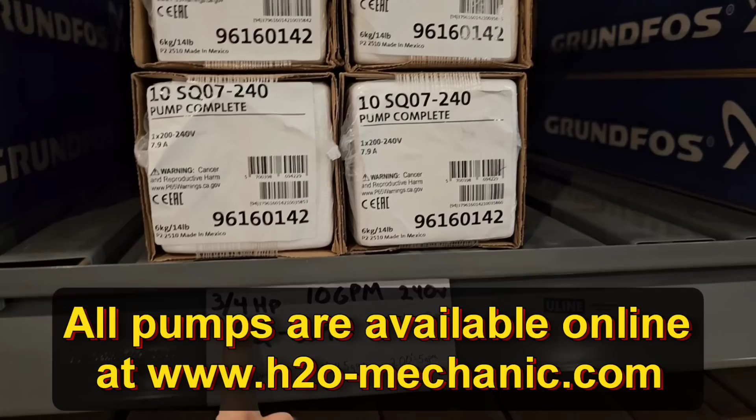We recently got some brand new Grundfos models in stock. This one, for example, let's see, SQ-240. So what we're going to do is a 3/4 horsepower, 10-gallon a minute pump. We're actually using this pump here to take the place of this pump here. So we're no longer going to sell the SQ-200. We're strictly jumping to the SQ-240.

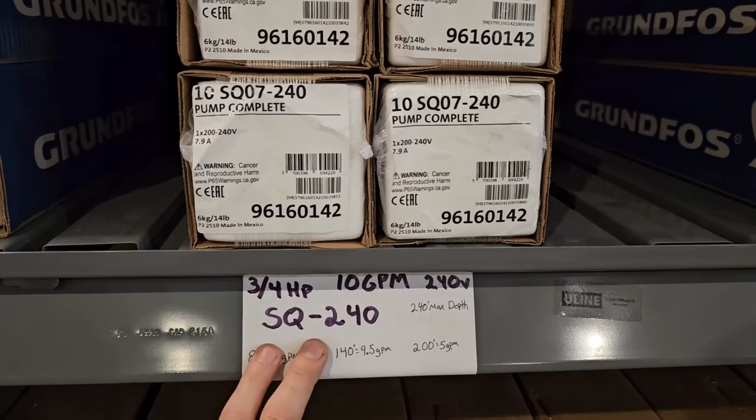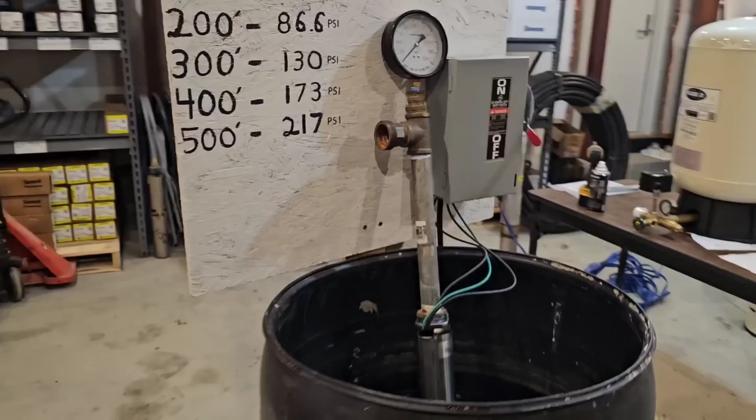So I've got somebody here today who wants to buy the SQ-240. So we're going to throw it in the test tank, and we're going to see what kind of pressures and what kind of flow this pump will actually do. Now we've got the 3/4 horsepower SQ-240 in the test tank right now. Got the wires hooked up. I still got to get my water flow meter hooked up in my return line. I need to get about 5 gallons of water and put it in the tank.

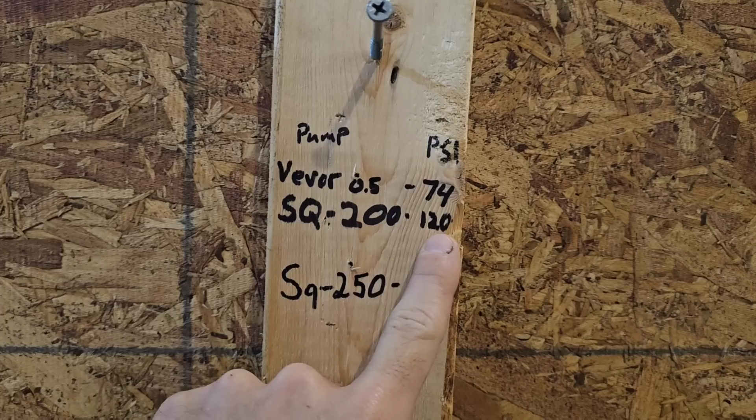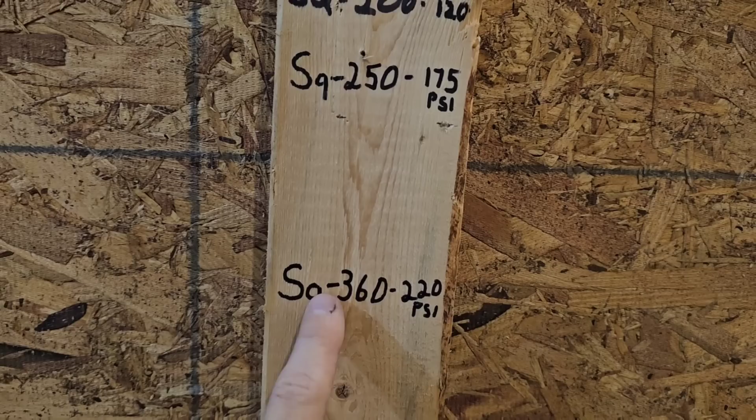We're doing this because we've tested the SQ-200. The max pressure we got was 120 psi. The SQ-250, which is a 15-gallon a minute, 1 horsepower, the max pressure we saw was 175. We jumped down here to the big one, the SQ-360. That was a special order pump that I do not carry. Now, I have a SQ-320 and a 330, but this was a big boy. That got me 220 psi. So this all equates to head pressure, how deep the pump is actually capable of pumping.

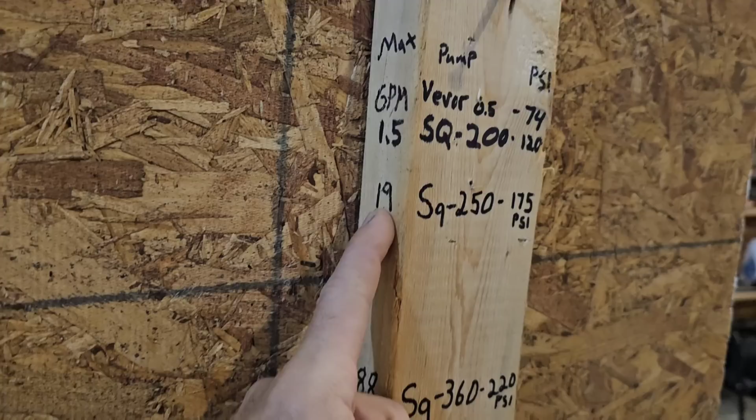And this is kind of like my little diagram. And then on this side, we got gallons per minute. So the SQ-200 at 120 psi gave me 1.5 gallons a minute. This one gave me, I think, 19 gallons a minute of maximum flow. And this one gave me 8.8 gallons a minute of maximum flow. That was a 5 gallon a minute pump. So I'm going to go ahead now, get it all wired up, fill the tank up with water, and get this thing on. And we'll see how much pressure it'll do and how much water it'll flow.

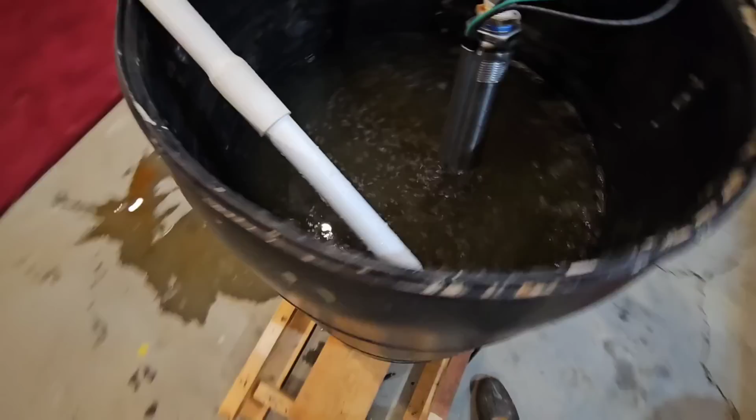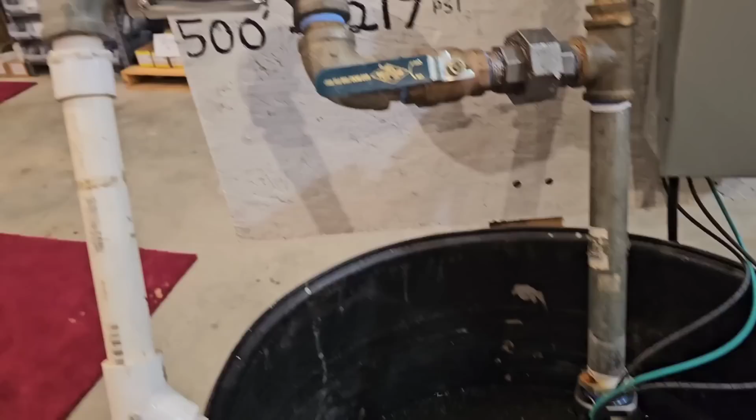All right, we've got it on. I put a little bit of chlorine in the water. Let's go ahead and flip the switch. It'll ramp up. Yeah. Okay. We're getting 14.5 gallons per minute of flow right now. Go ahead and put the discharge back under the water. All right. Now let's see here. We've got 14.5 gallons a minute.

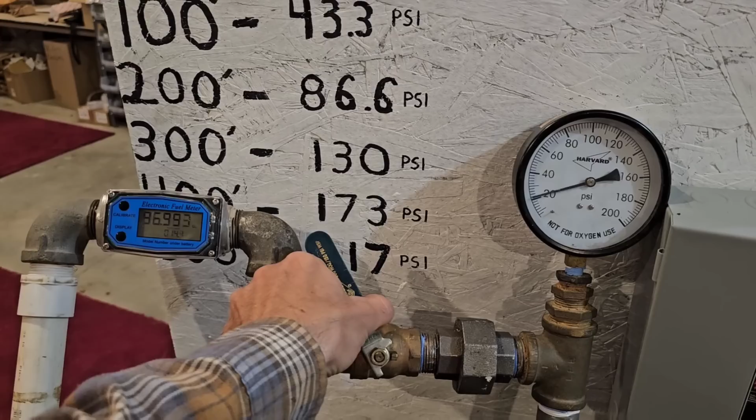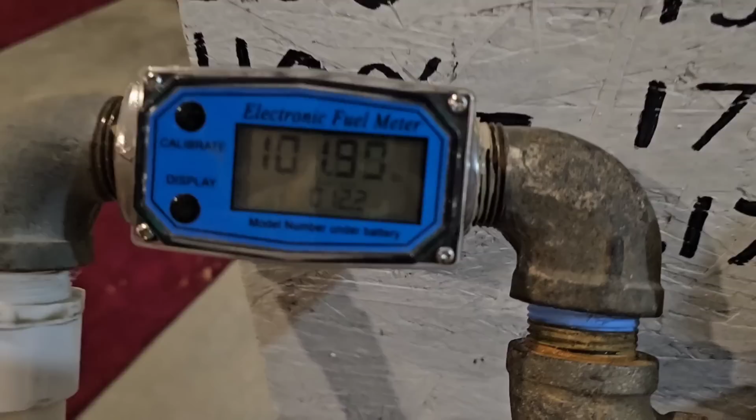That's basically zero pressure. So let's get it up to operational pressure for the pressure switch. It's going to be around 60. And it should be a 10-gallon a minute pump. So 10-gallon a minute pump, we'll bring it up to about there. That's going to be typical operating head pressure of this pump if you install it in the well and use it, right? We're getting 12.2 gallons per minute. So that's roughly 80.

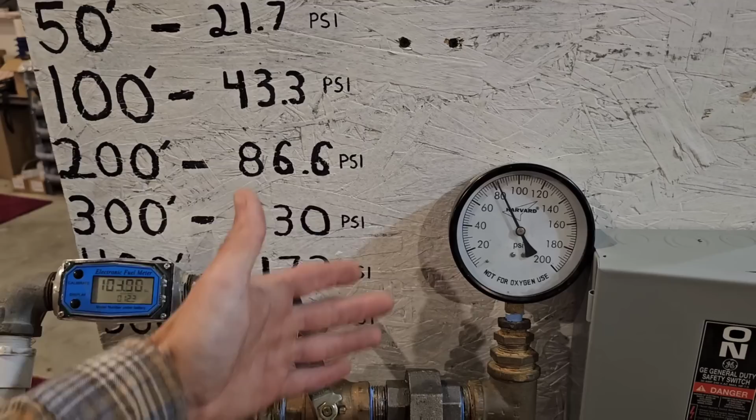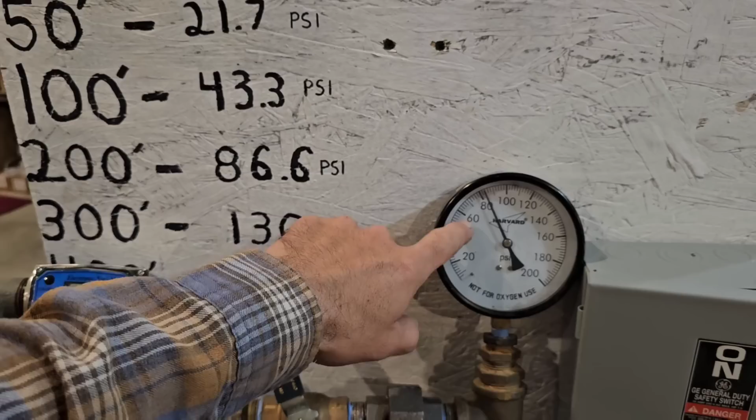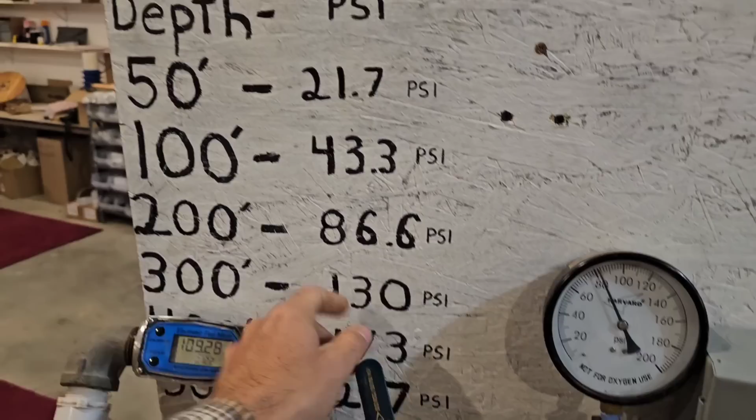That's where like a static water level is at 30 foot. That's what that indicates, because you've got 60 pounds of operating pressure on your pressure switch, and then the other 20 psi, it takes 20 psi to lift water 30 or 40 feet. Let's go ahead and close it down. Let's see up here. So 100 feet is 43 psi. So let's do 100, because we need to add 60 to that number, right?

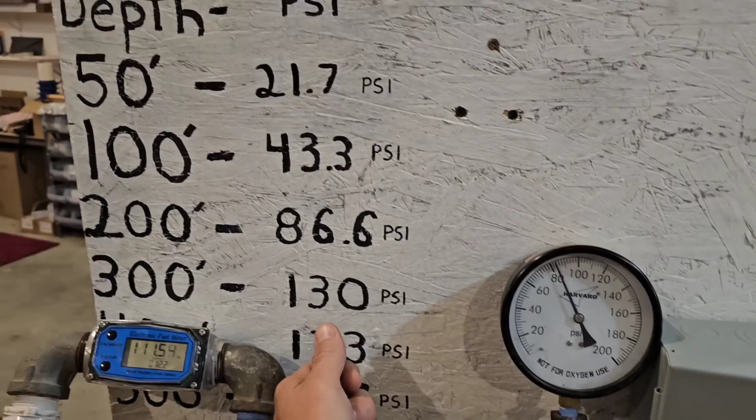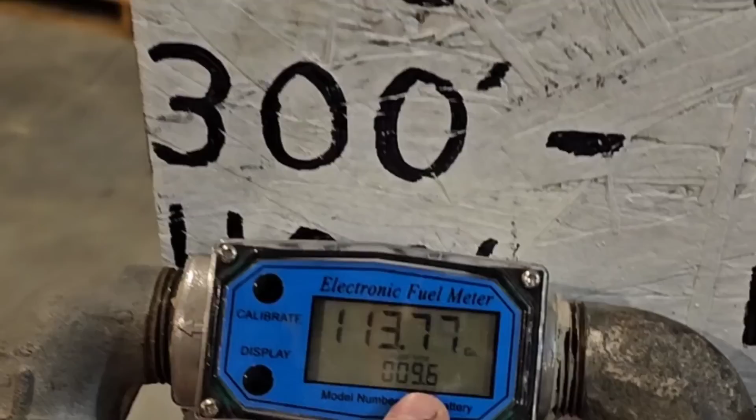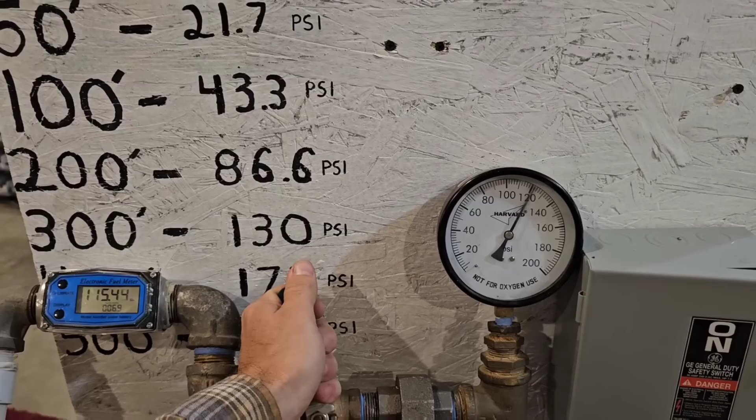So let's bring it up. That's a pretty good, what is that? That's about 105. So that would be a 100-foot water level, 60 psi, and it's still flowing 9.5, 9.6 gallons per minute. Really good pump, honestly. Let's go ahead and close it off even more. Let's do 200 foot. So what would that be? Around 140.

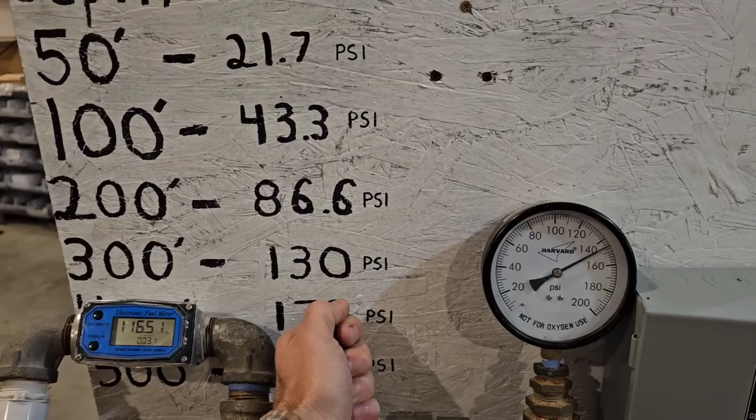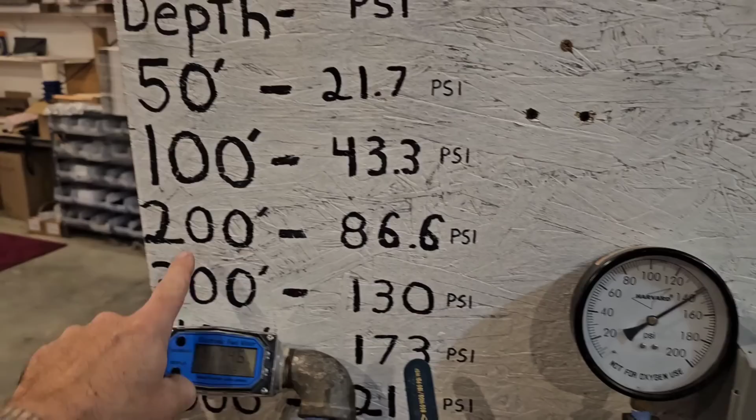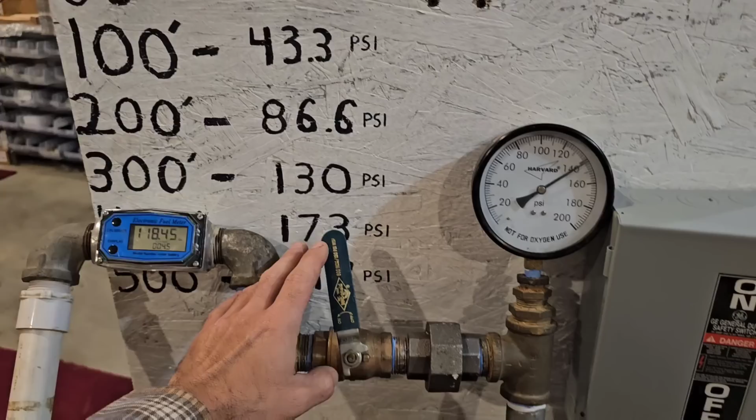All right, so there's 100 and let's get it a little bit more. All right, so we're at 140 psi. That would be the water level in the well down at around 200 feet, and we're getting 2.5 gallons a minute. Now I'm gonna compare all these numbers to what Grundfos says their flow chart is, which right now, in my opinion, based on what I've seen in the past, this is spot on with their flow chart.

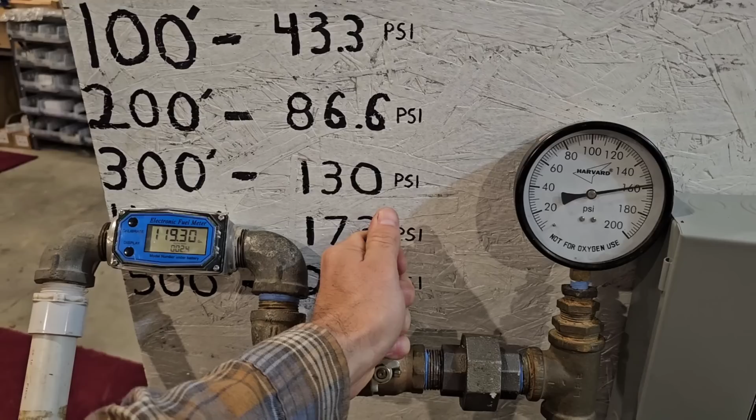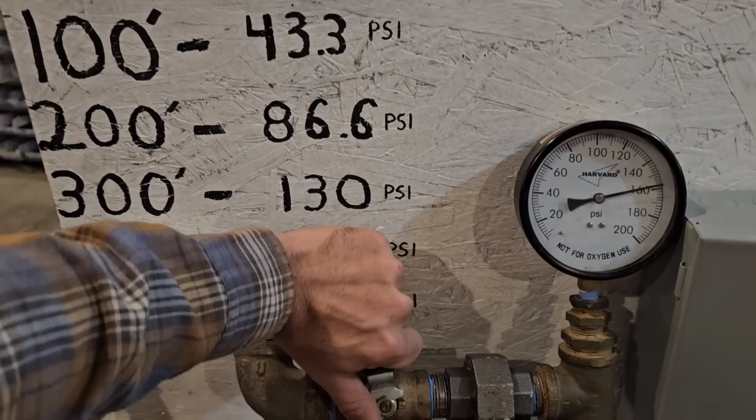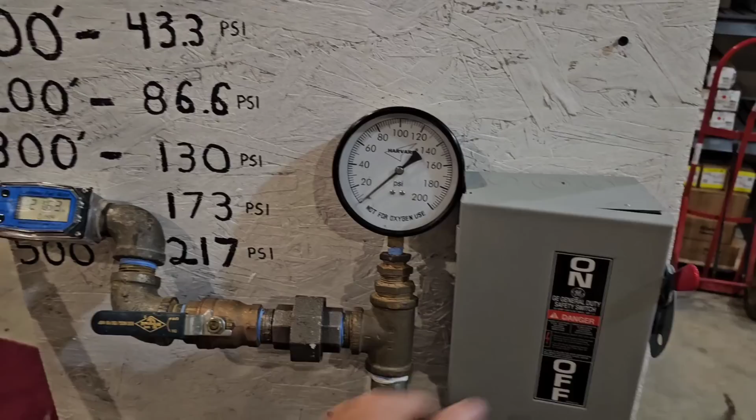Let's see what our maximum, let's get 1 gallon a minute of flow. So we got 1.2 gallons a minute of flow, and we've got basically 158 psi, 160 psi. So 160, that's 100 psi. Yeah. 100 psi falls right in between here. So this pump probably has a maximum lift capability of about 250 foot to still satisfy and shut off the pressure switch, which is key.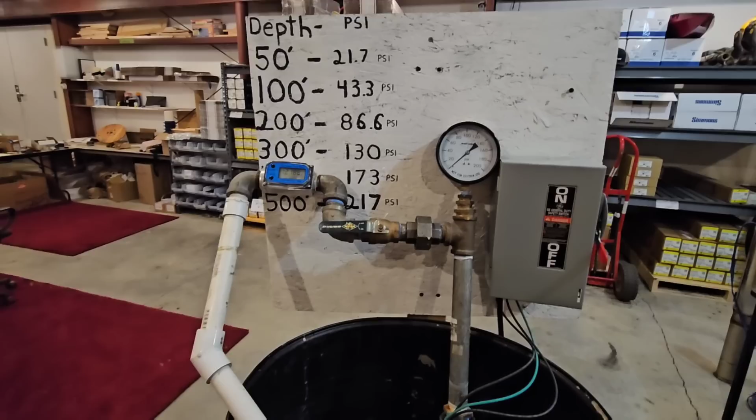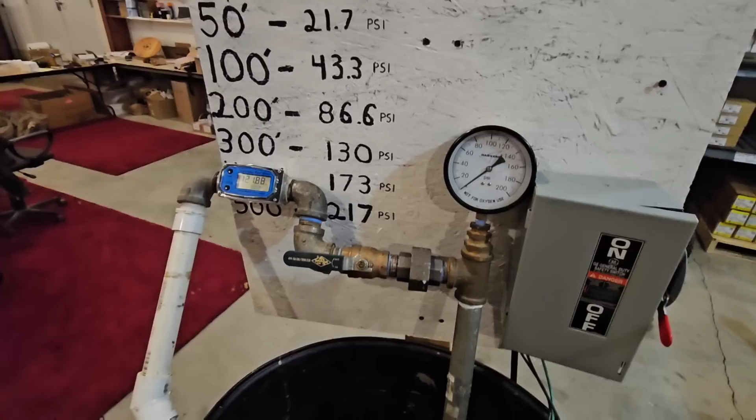You don't want to say my max head is 350 foot and put a pump at 350 foot and it not be able to shut off the pressure switch. That's the problem with people when they say max head. Max head does not mean it'll shut the pressure switch off. It means that's the maximum depth it can actually lift water from, but when it gives it to you, you're only going to get 1 or 2 or 3 or 4 psi. There's just nothing left for usable pressure at that point.

But very cool. We just wanted to test this pump for the customer. He's here to pick it up, so I had the opportunity to test a brand new SQ-240.

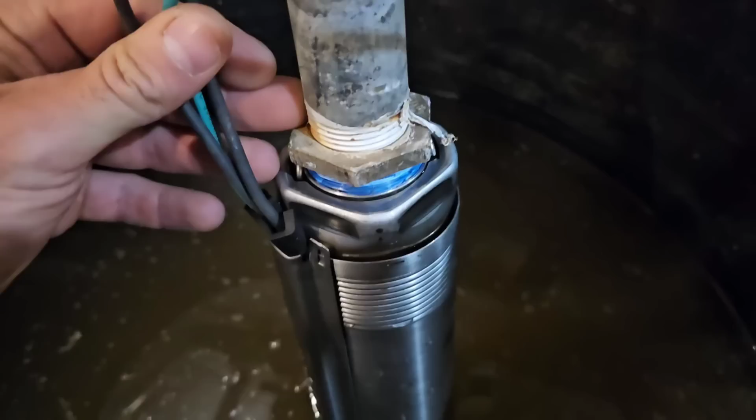And check this out. So plumbers, installers, pump guys, y'all will love this. Check it out. The new Grundfos heads got 4 sides on that. I know everybody over the years has been frustrated with the 2 sides on the Grundfos head and how they always end up being right where the wire is. Well, now you've got 4 sides on the Grundfos.

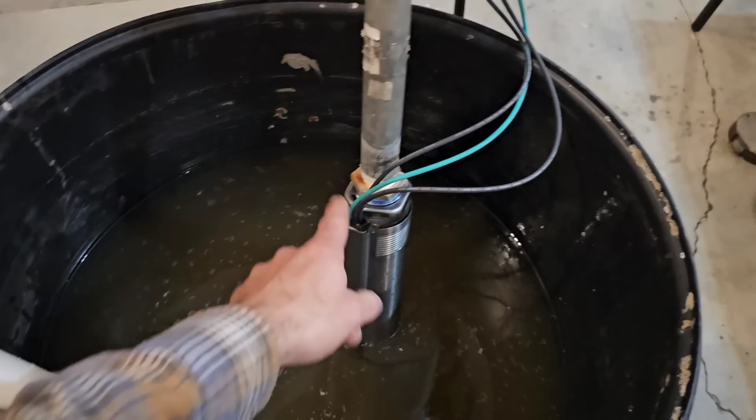Very cool. I've actually got a story to tell y'all about that. I just haven't shared it yet. So, cool. We've got it for our records.

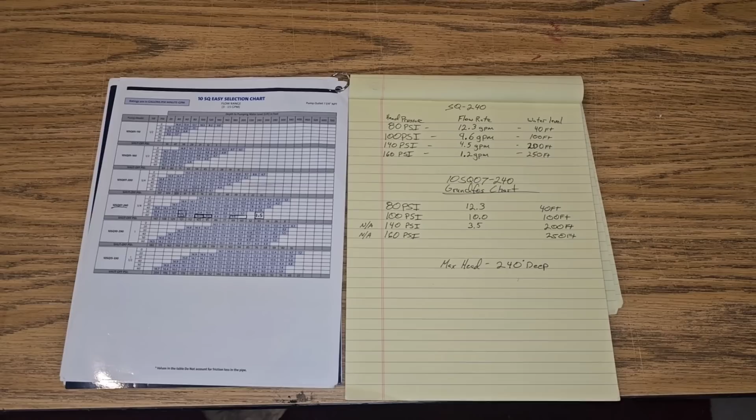We're good. So now that we're done testing the SQ-240, let's compare the numbers that we got to the numbers that Grundfos gives us on their chart. Let's see how close it is to what we got. A lot of times pump companies will kind of fudge the numbers, but with Grundfos I've always found that they are absolutely spot on. So let's look here.

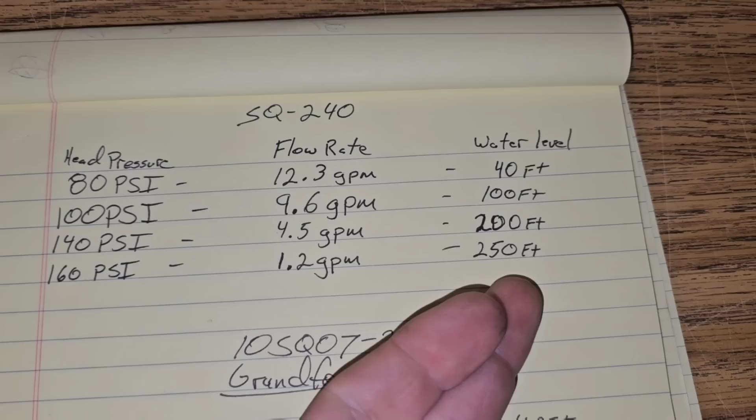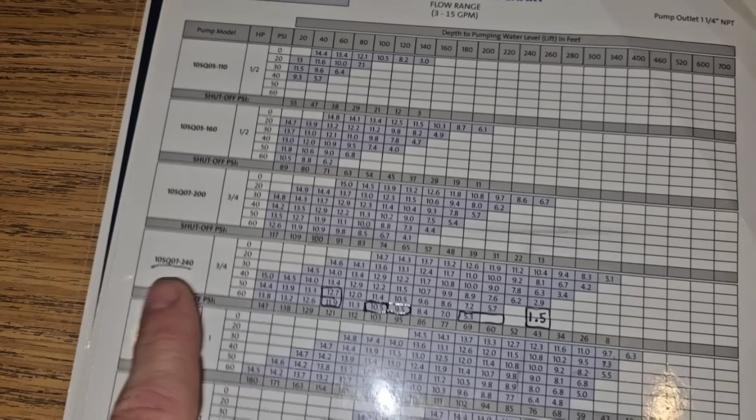So these are the numbers we got. This is our head pressure, this is our flow rate, and this is our projected water level, okay? Now we have the Grundfos chart here, and I went ahead and took the liberty of marking the pump that we tested, and the pressures correlated with what we've got on that.

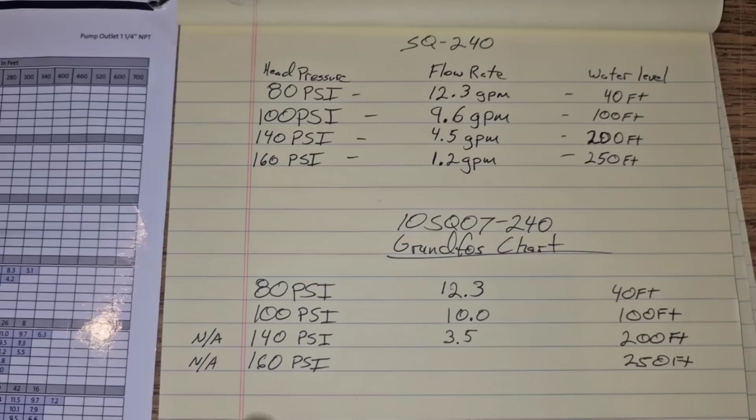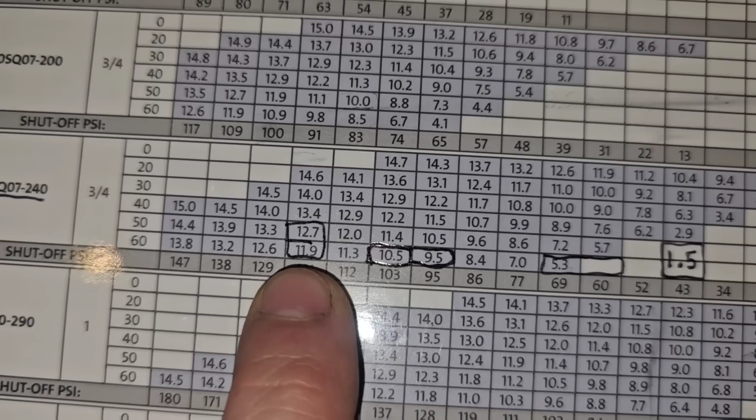So our test showed at 80 psi, 12.3 gallons a minute, 40-foot water level. Down here, the Grundfos chart, 80 psi, 12.3 gallons a minute, 40 foot. The exact same. Now let's come over here. I wrote down 12.3. On the chart, it shows 12.7 to 11.9. It falls right in the middle of that at 12.3.

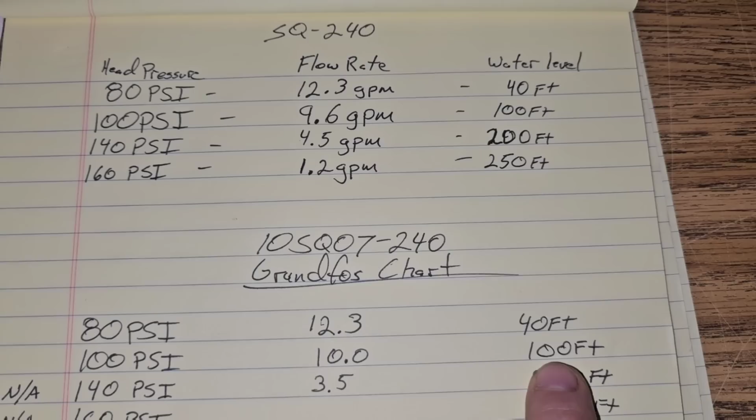We come over here to our second test, okay? The number falls between 10.5 and 9.5. So the number would be 10. So if we look at our second test, 100 psi, I got 9.6 gallons a minute of flow at 100 feet. We come down here and convert it to their chart. 100 psi, 10 gallons a minute, 100 feet. They are spot on. That is within what? 5% variable there. Not bad.

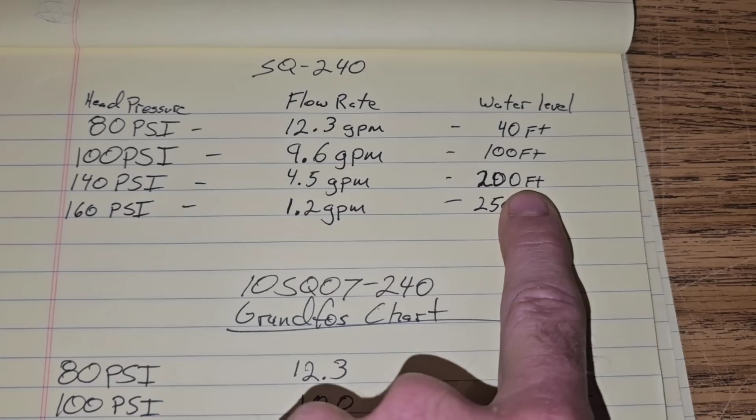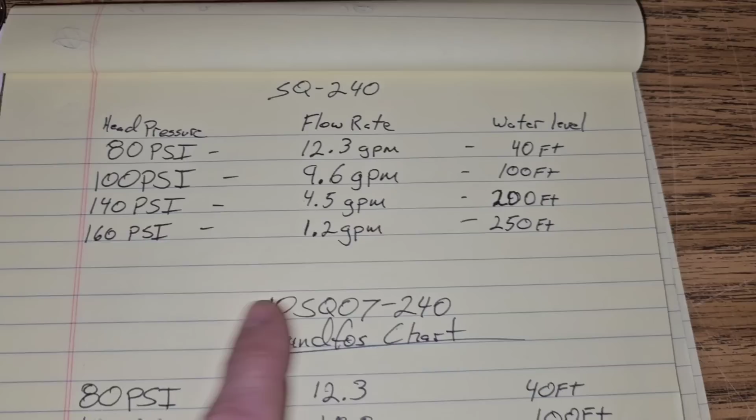Now let's look here. 140 psi on my test. 4.5 gallons a minute at 200 feet deep. Now that's your water level depth, not your relative pump setting depth. That's how far you drew the water level down in the well if it was a low production well. So 140, 4.5. Now let's look at the chart. They don't have that listed, but they have the one right before 4.5, which is 5.3. So the empty square on my test theoretically would fall under the 4.5 category. So there again, spot on.

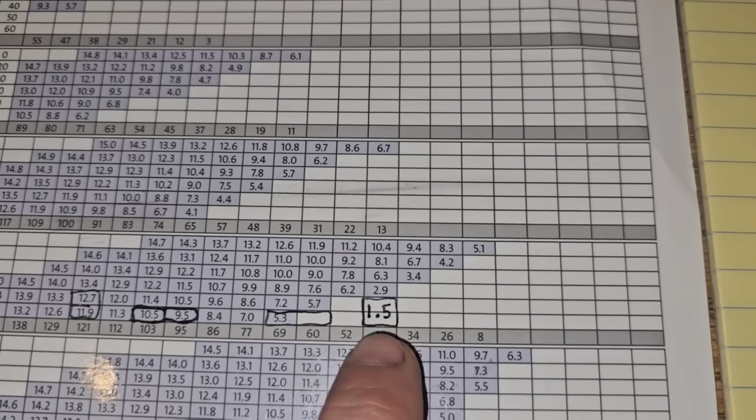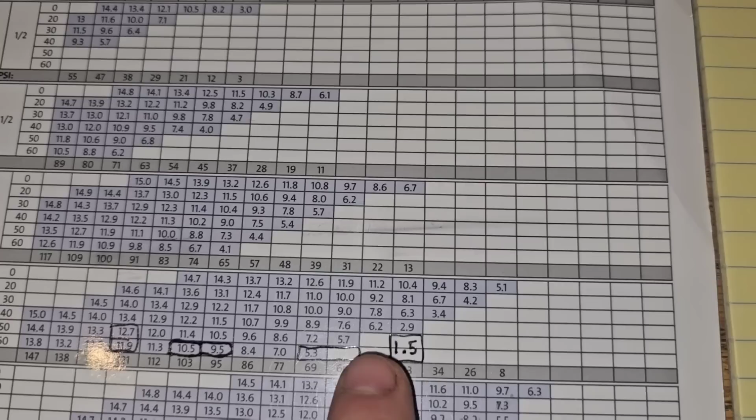Now you see here 1.5, you go up here 1.5 gallons a minute. They don't have that listed because we're beyond the recommended max head of this pump, which is 240 feet. So if you go where I had put 1.5 and go all the way up, we're at 260 feet here. They recommend that pump no deeper than 240. Because at that depth, it'll still shut off a pressure switch.

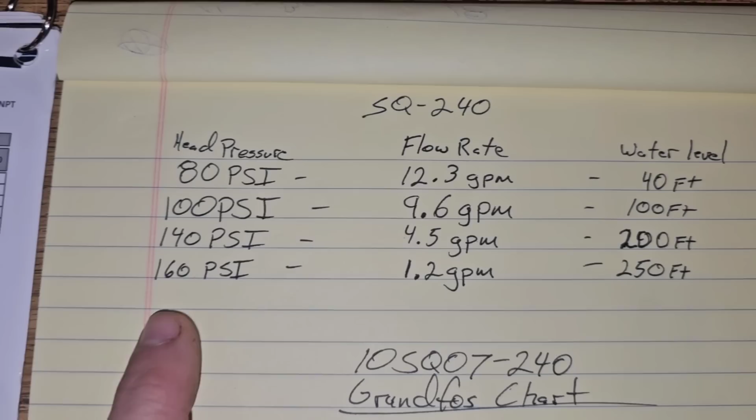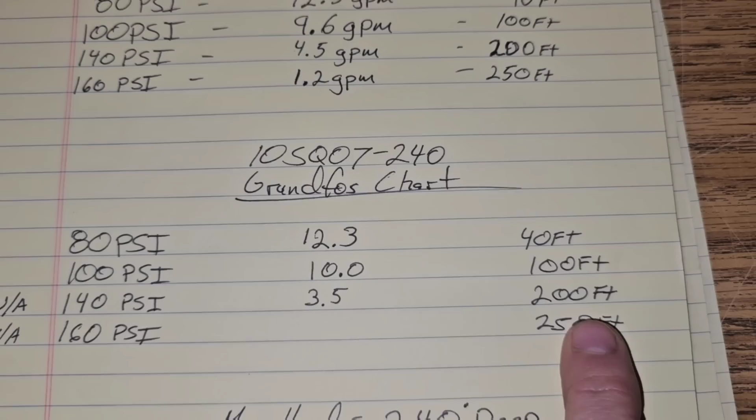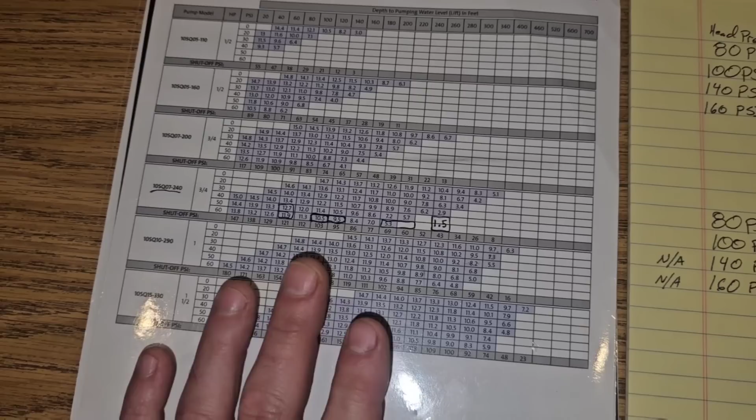So where my test shows 250 feet, we got 1.2 gallons a minute, giving us a maximum pressure of, I think we got 158 psi. I just went ahead and put 160. We come down here, NA, non-applicable because it's not on the chart. That's beyond the limit. SQ-240. Max head 240 feet deep. So that's pretty cool that the numbers Grundfos gives us on their flow chart are 100% accurate to the max head that they tell us the pumps are capable of doing.

I've had a lot of issues in the past with people buying cheaper well pumps like this one right here behind me. That's a Vevor, 1.5 horsepower, probably a 20-some gallon a minute pump. I think the max head they said was 327 feet. When we tested that pump, it only had a maximum lifting capability of 140 feet. So the max head on some companies is a lie. That's why you really have to pay attention when you buy a pump. If you go the cheap route, you're going to end up paying for it in the long run.

That's why every customer who reaches out to me inquiring about well pumps, I almost always point them in the direction of Grundfos, because one of the 8 models that we carry in stock can almost always fit my customers' scenarios, you know, what their well is. That's where a lot of my time goes, answering emails, trying to figure out what type of well you have and what type of pump would be best suited for that well. Not every pump should go in every well, but you have to size a pump according to the specifications of your well. Hopefully that makes sense.